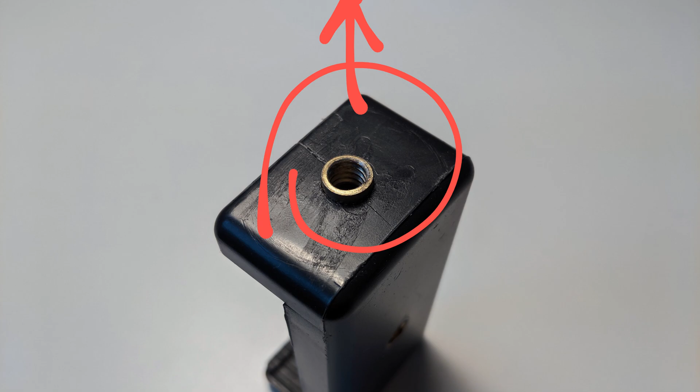Then, the push-fit screw mount where the tripod connects popped out and no longer held its position. If I were to use this smartphone mount, there's a chance it could break off and fall to the ground. Replacements are not actually that expensive. You can find them on eBay for about $5 a piece.

You get what you pay for, of course. They're designed for cheap manufacture, and not to last. And why not? If they break, you have to buy more. Oil was cheap, right? But before throwing them away and getting new ones, I wanted to take a crack at repairing them myself.

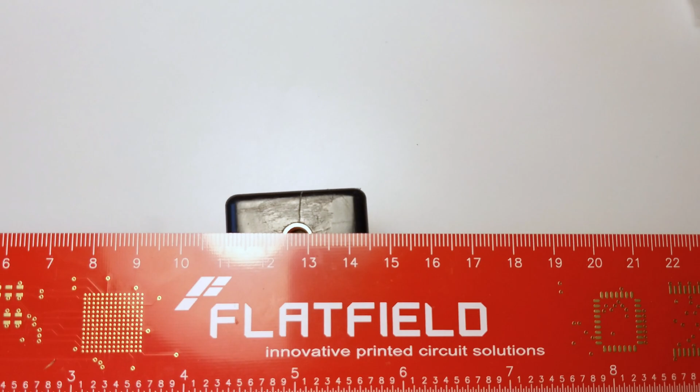So I mocked up the two tripod mounts. The one on the left is broken. The one on the right represents the concept I would like to use to fix the threaded screw hole into place. Measuring them out, we can see that it's about 35 by 25 millimeters, and we can see that the hole is centered within that rectangle. This gives us an idea of how to create the first test fitting.

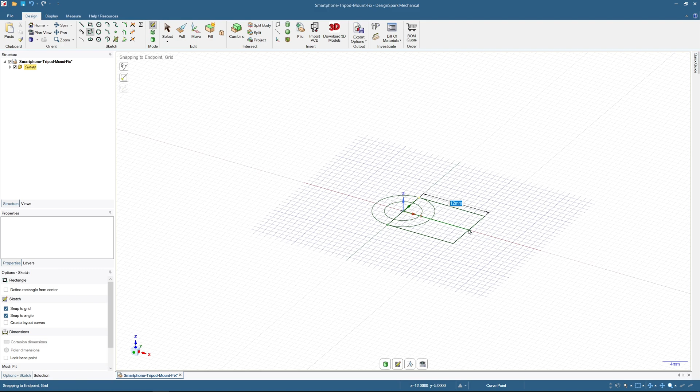I've sped up the video 3 times, but the basic idea with the test fitting is to show that the critical dimensions are correct. In this case, where the center of the hole is in relation to the long side of the rectangle. Printing out the test fitting gives you a chance to check out the dimensions before moving on to the final model. Since the final model usually takes a longer time to print, skipping the test fittings means that the final model could print, but be physically incorrect. This wastes more plastic and wastes your time.

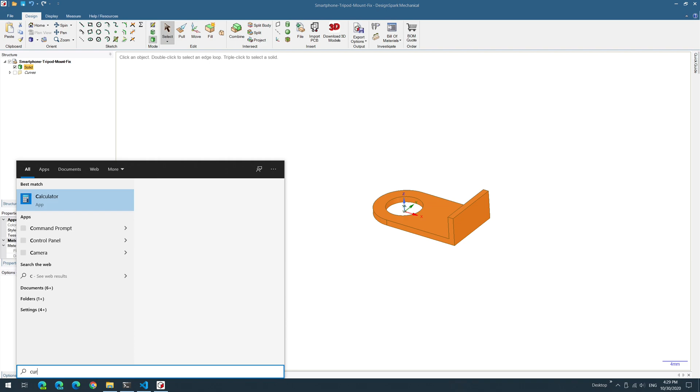With the modeling complete, we move on to the next phase by exporting the object as a standard STL file. Then, we open the file in Ultimaker Cura, and after making sure that we have the standard profile selected with 0.2 millimeter layer heights, we go ahead and slice the model. Now it's time to print. In real time, the print takes about 3 minutes, but I've sped it up here about 8 times.

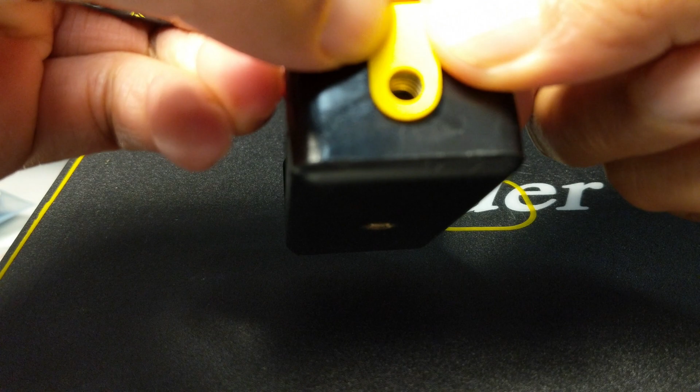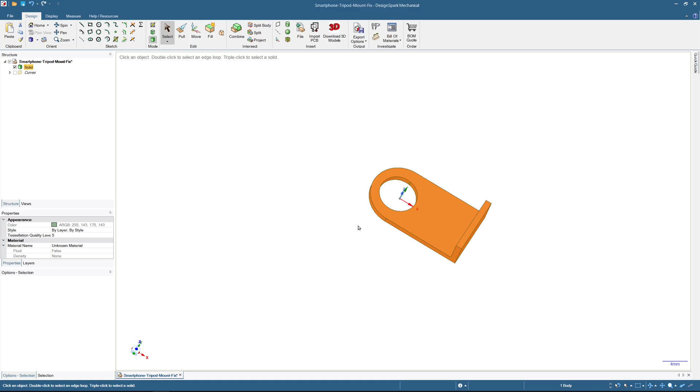When the print is finished, we check whether it fits correctly. In this case, the hole appears to be off by less than a millimeter and needs to be corrected in the model. So here we're moving the hole over slightly, about 0.1 millimeters. And the hole appeared to be slightly too small as well, so we increased the diameter by 0.2 millimeters. Then we run it through the slicing procedure and send it off to print. Again, we'll speed through this part.

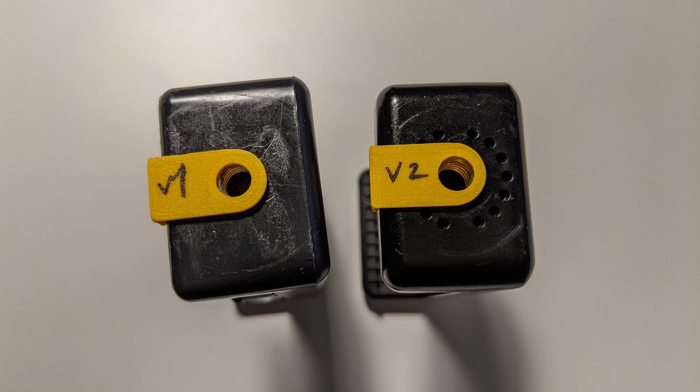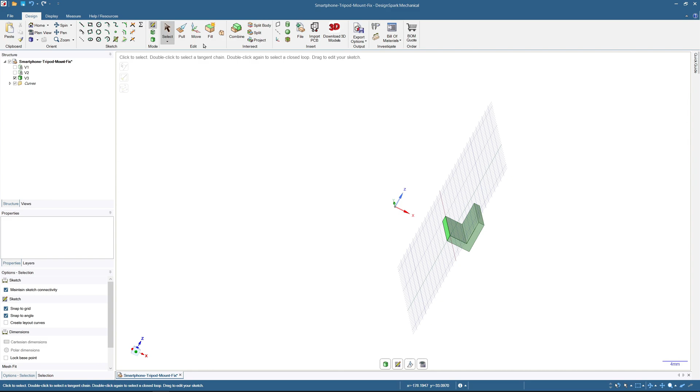When we look at the test print side by side, we can see that the second version has a better centering and hole size than the first version. Now that we know that our critical dimensions are correct, it's time to build the final version. First, we set up a 3 millimeter round at the corner where the patch part touches the tripod mount. There's actually an easier way to make this using the pull tool to make a 3 millimeter rounded corner, but somehow this slipped my mind at the time.

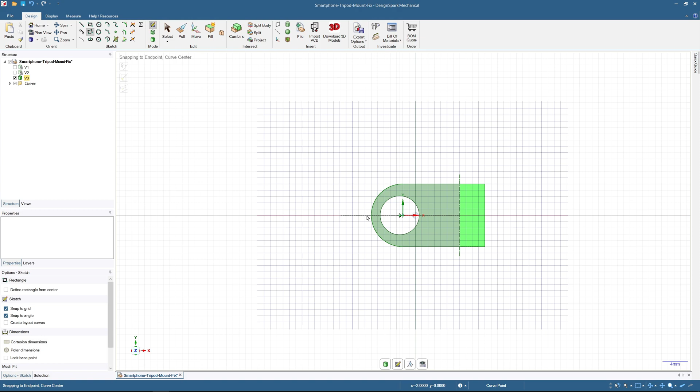Then we extend the base plate to be wider and longer so that there's more surface area for the glue to attach to. We're not too concerned about the exact dimensions, we just want to make sure that the patch part is smaller than the 25 by 35 millimeter plate that it's going to be attached to. We use the pull tool in DesignSpark Mechanical to adjust the lengths of each of the sides, as you can see here.

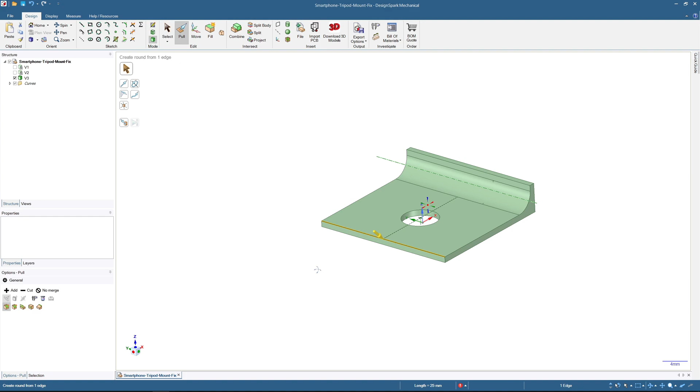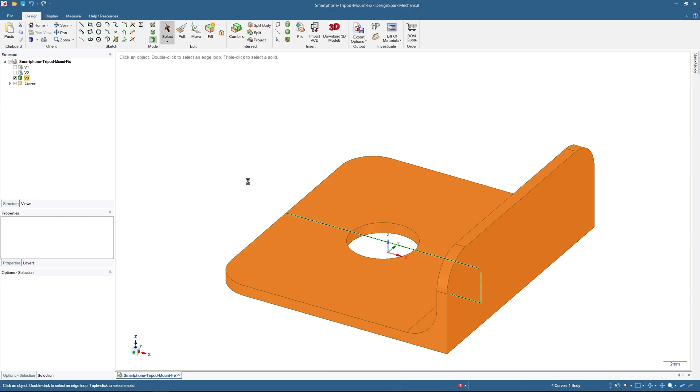And it's always nice to have rounded corners. So we set the radius to 3 millimeters on 4 of the corners. With the model completed, it's time to export it, slice it, and send it to the printer. The cool thing is, if this model works, we'll be able to save the tripod mount that costs about €5 with about 4 cents worth of plastic.

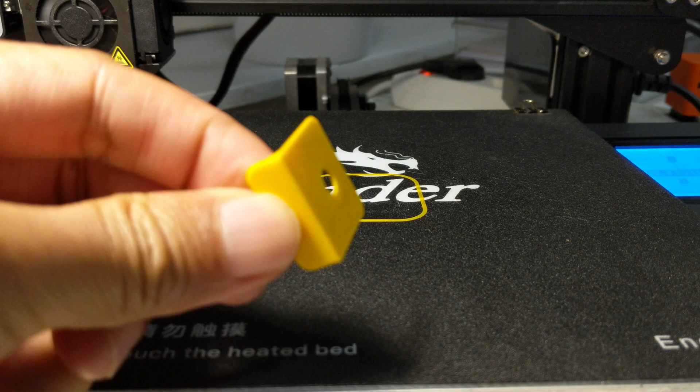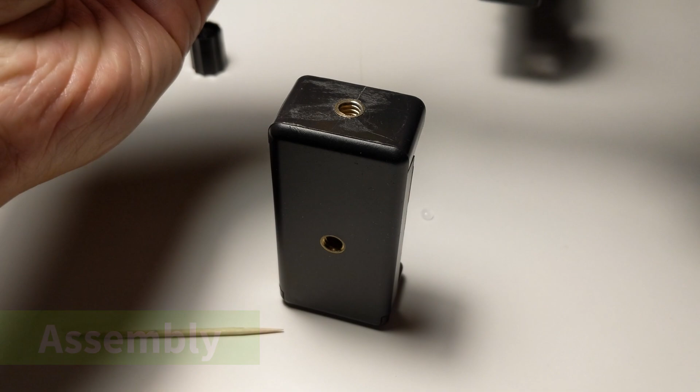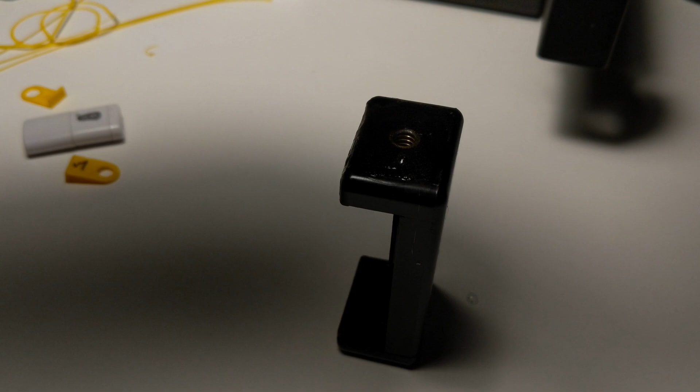Once the print completes, we check it against all of the other components in the tripod mount system to make sure that all of the pieces line up before gluing it. Since we're satisfied that all the parts align, we go ahead and glue the pieces together. The repaired tripod mounts look like this when the glue is still wet. And here we see the progression between the test fittings and the final parts.

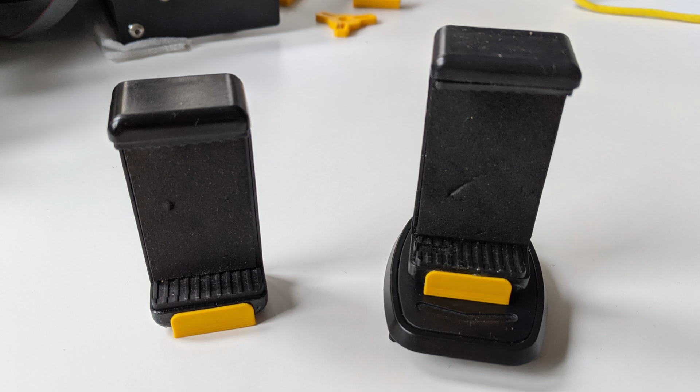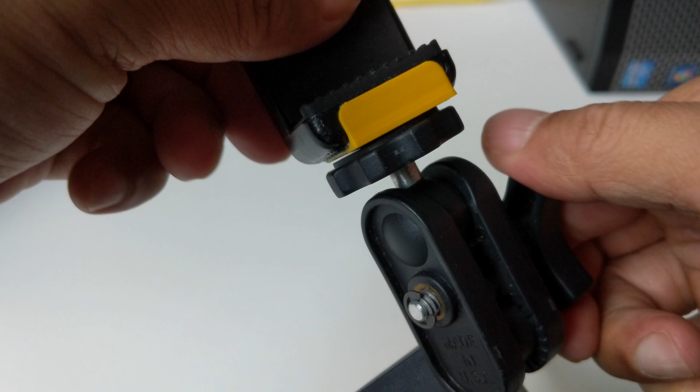After letting the pieces dry all weekend, I attached one of them to the quick change tripod mount. And I attached the other one to the miniature tripod that I have. With the patch part in place, the press-fit threaded hole can't be pulled free from the smartphone tripod mount, so it stays securely in place atop the tripod when it's screwed in. Here's what they look like attached to their respective tripods, all repaired.

So that's how you fix 2 broken smartphone tripod mounts with about 8 cents worth of plastic. Of course, this is a situation where probably a piece of cardboard or hard plastic that you could find in the trash would work just as well. But if you wanted to model and print a patch part for any other broken thing that you might have, the general engineering process outlined in this video will work.